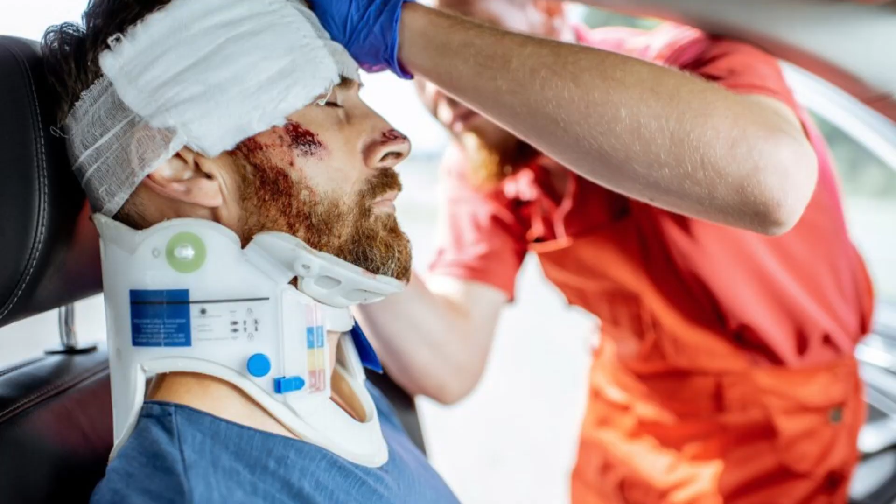Most catastrophic bridge collapse. Bridge collapses are some of the most catastrophic and tragic engineering disasters that can occur. The structural failure of a bridge can lead to significant loss of life, property damage, and disruptions to transportation networks. In this video, we will examine 10 of the most devastating bridge collapses in history, each with its own unique set of circumstances and consequences.

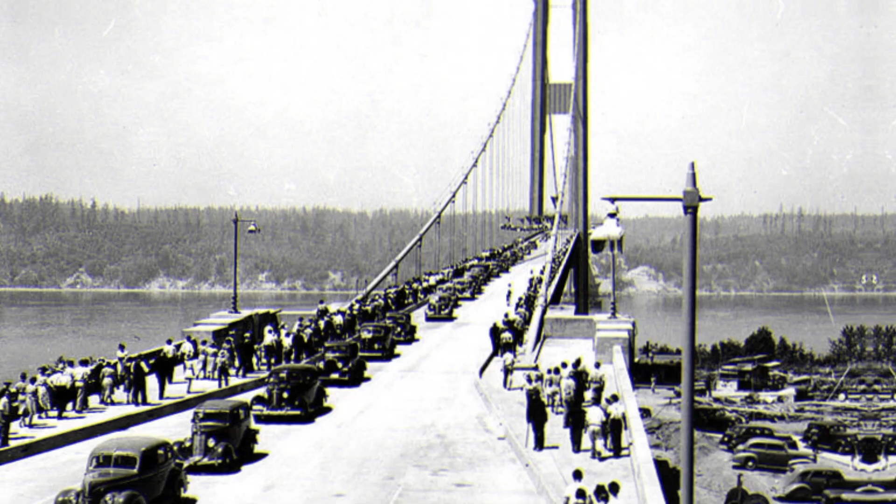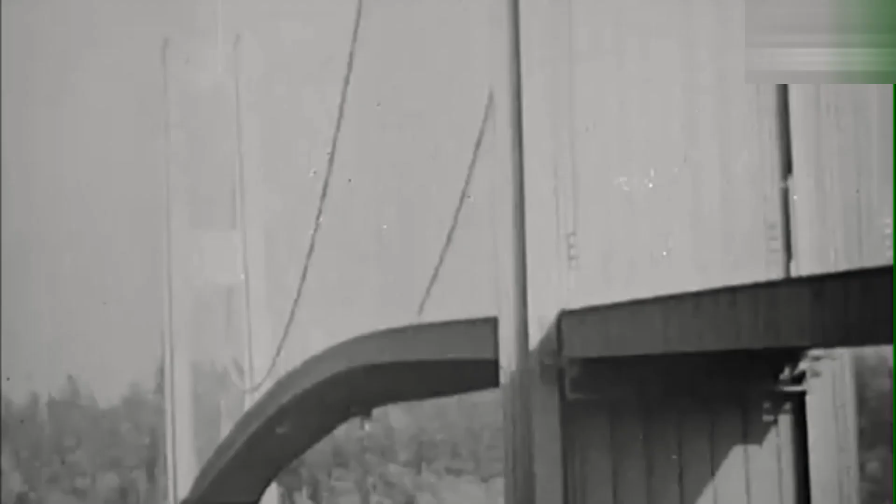1. The Tacoma Narrows Bridge Disaster. On November 7, 1940, the Tacoma Narrows Bridge, infamously known as Galloping Gertie, met its demise in a spectacular fashion. This catastrophe became a pivotal moment in engineering history, primarily attributed to aeroelastic flutter. This phenomenon occurs when winds passing through the bridge's structure induce oscillations that escalate uncontrollably.

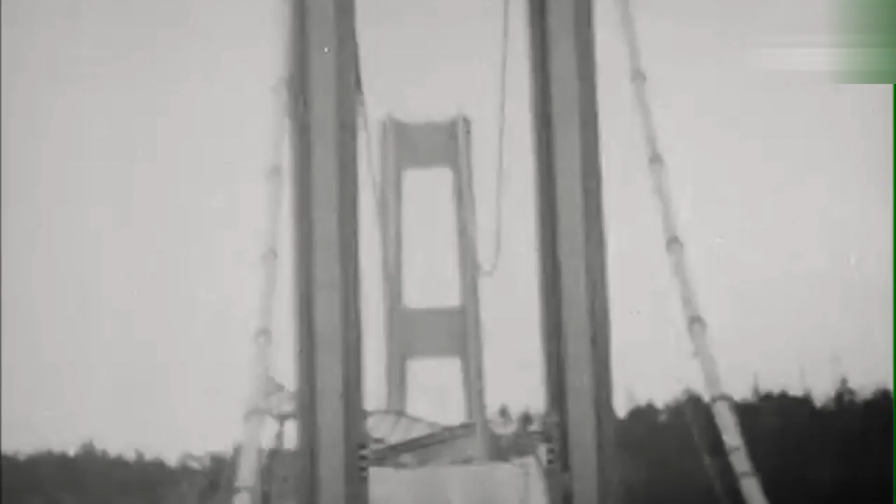Despite the bridge's design to be aerodynamic, it was not equipped to handle the dynamic stress caused by the wind. On that fateful day, with winds reaching speeds of around 40 miles per hour, the bridge began to undulate violently. This movement eventually led to its collapse, sending the roadway plummeting into the waters of the Tacoma Narrows. Remarkably, there was only one casualty, a dog trapped in a car stranded on the bridge.

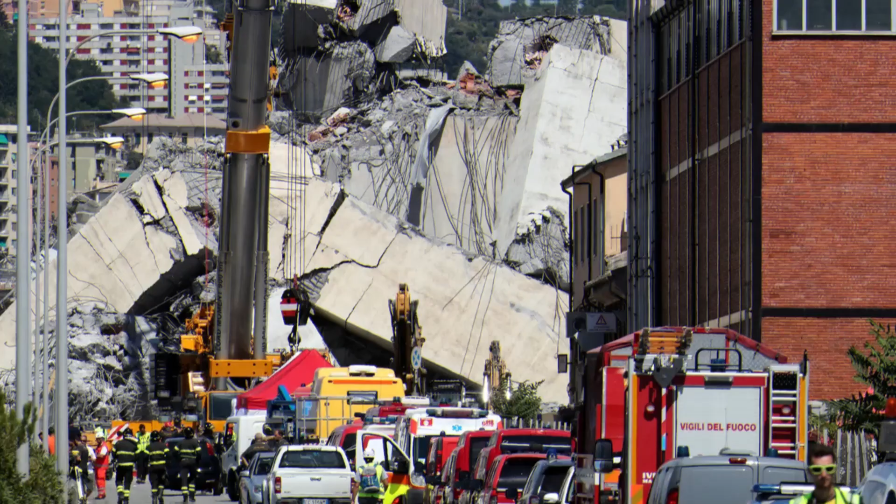2. The Genoa Bridge Collapse. On August 14, 2018, the Morandi Bridge in Genoa, Italy, suffered a catastrophic failure, sending cars and debris crashing to the ground below. This tragic event resulted in 43 fatalities, numerous injuries, and the displacement of hundreds of residents.

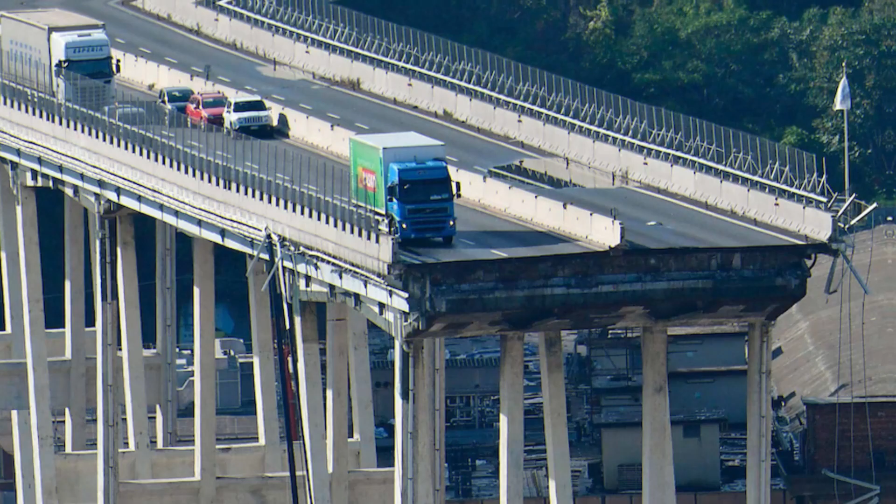Investigation into the collapse pointed to a lethal combination of factors: aging infrastructure, corrosion of concrete and steel reinforcement, and years of neglected maintenance. The design of the bridge, which relied on pre-stressed concrete stays and reinforcements, was scrutinized for its vulnerability to degradation over time.

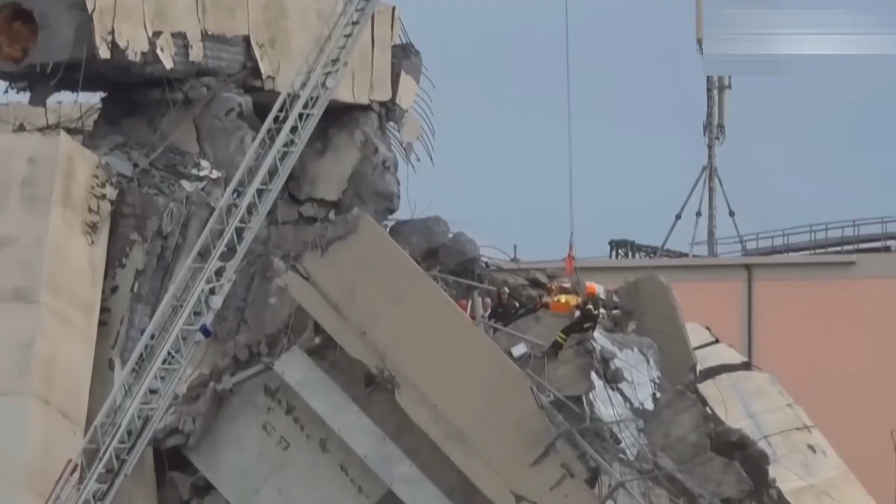In the aftermath, this disaster has become a stark reminder of the critical need for ongoing inspection and maintenance of aging infrastructure to prevent such tragedies. It also sparked a nationwide audit of Italian bridges and viaducts, aiming to ensure their safety and structural integrity.

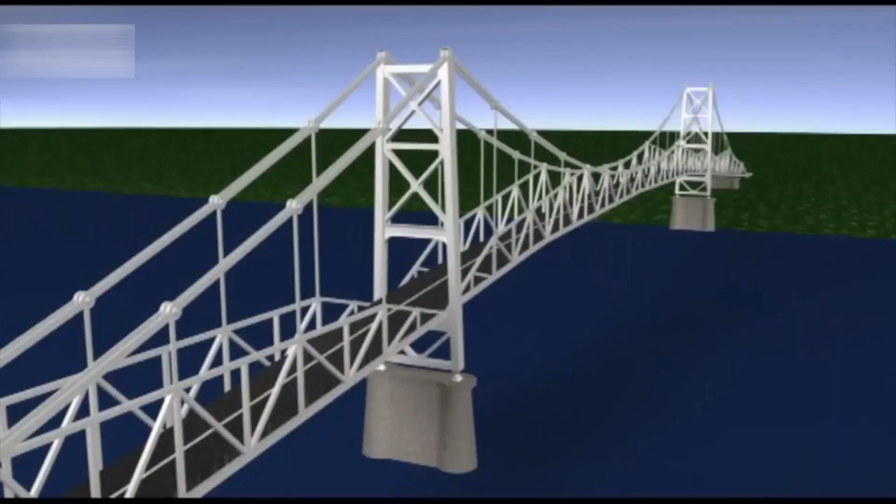3. The Silver Bridge Tragedy. On December 15, 1967, the Silver Bridge, connecting Point Pleasant, West Virginia, and Gallipolis, Ohio, met a grim fate when it suddenly collapsed during rush hour traffic. The bridge, which had been in service since 1928, fell into the Ohio River below, taking with it 46 lives and leaving the communities on both sides in shock.

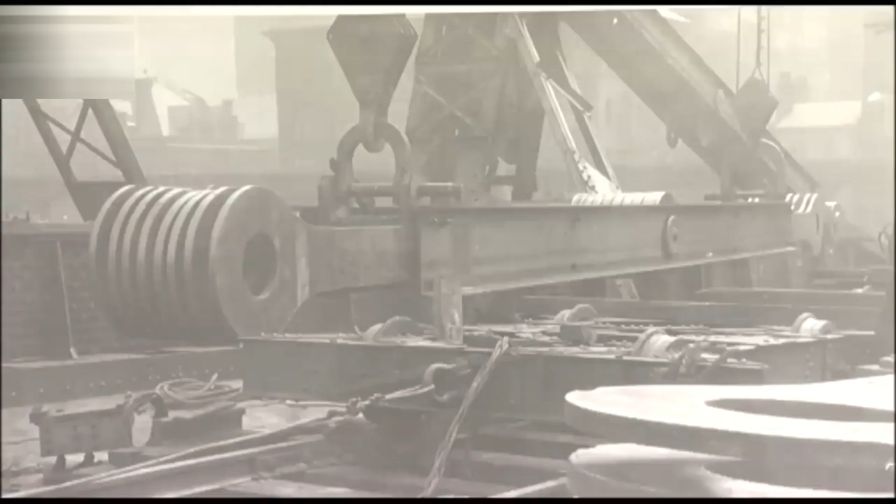The tragedy was traced back to a tiny defect in a single eye-bar in the suspension structure, a critical component that was not adequately inspected or maintained. This flaw led to a chain reaction, resulting in the bridge's complete failure.

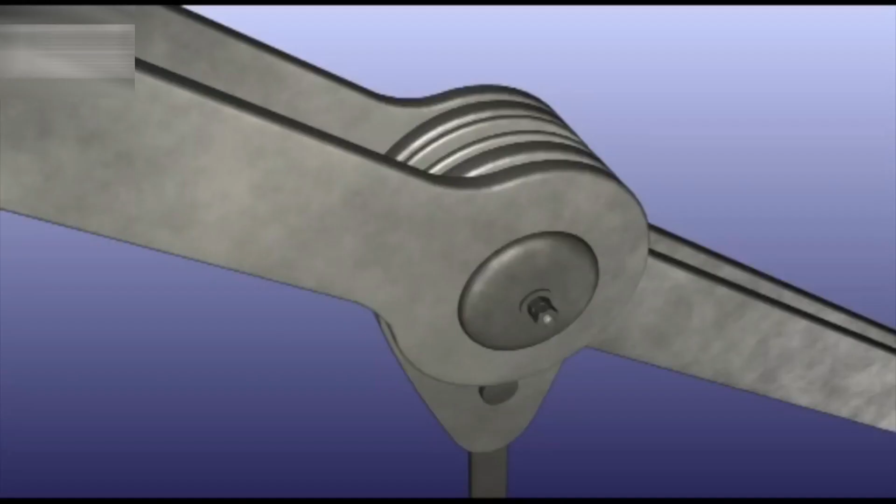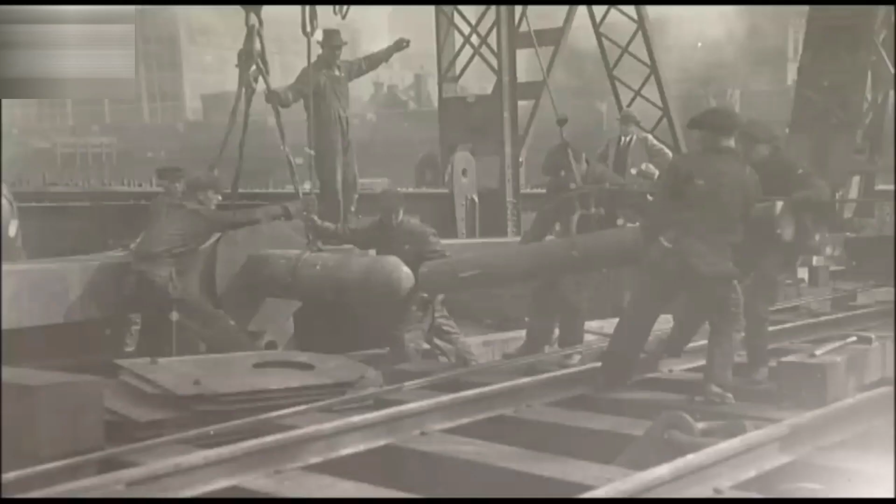The Silver Bridge disaster highlighted the overlooked dangers of material fatigue and corrosion, underscoring the urgent need for regular and thorough inspections of aging infrastructure. It served as a harsh lesson in the potentially fatal consequences of neglecting bridge maintenance and spurred significant changes in how bridges across the United States are inspected and maintained.

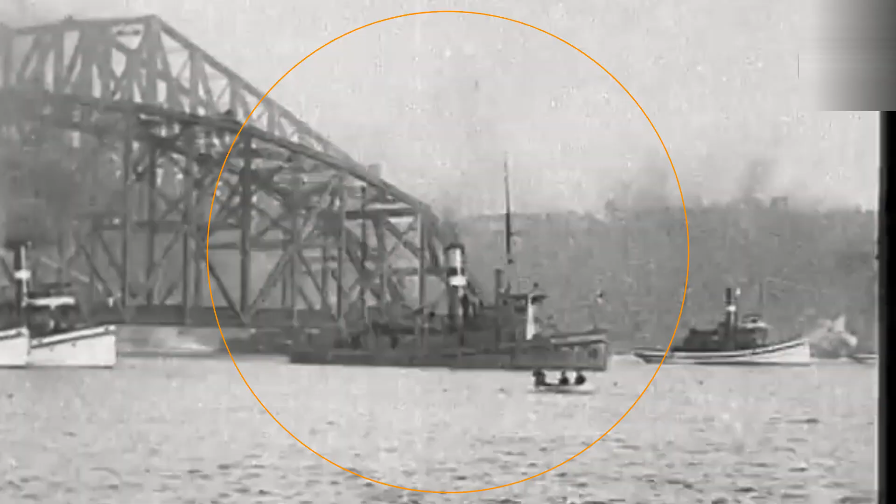4. The Quebec Bridge Collapse. The Quebec Bridge, intended to be a marvel of early 20th century engineering, instead became a case study in the catastrophic consequences of miscalculations and oversight failures.

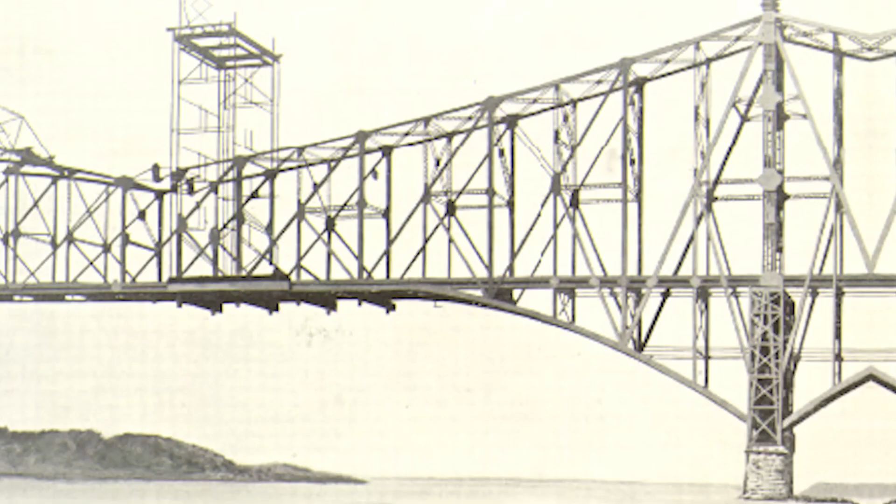The first collapse in 1907 was a devastating blow, resulting in the loss of 75 workers' lives due to inadequate attention to the load-bearing capabilities of the structure. Engineers and constructors had underestimated the weight the bridge would need to support.

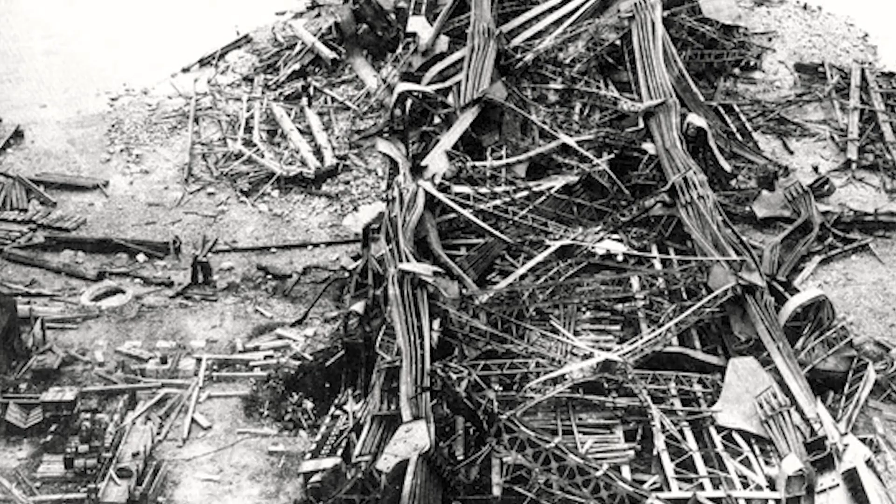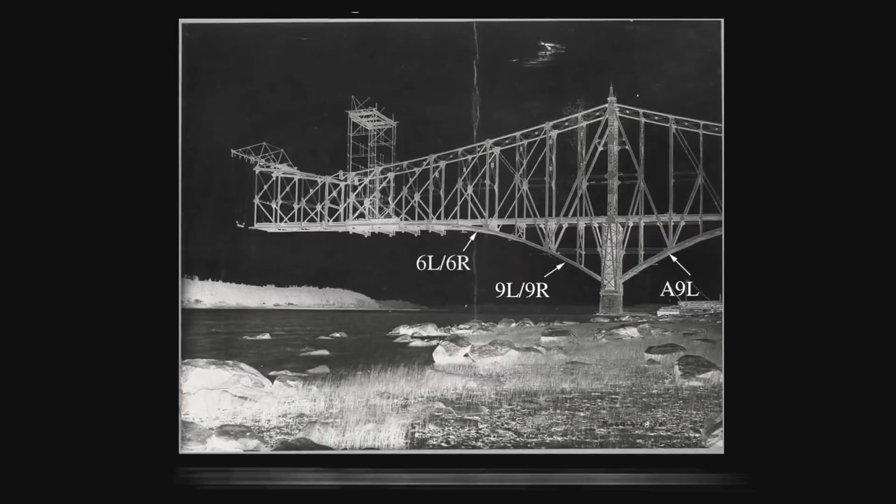This tragedy was compounded by a second collapse in 1916 during the bridge's reconstruction, claiming an additional 13 lives. Miscommunication and the persistence of earlier design flaws contributed to this second failure. These events shook the engineering community, leading to more stringent standards in bridge design and construction oversight.

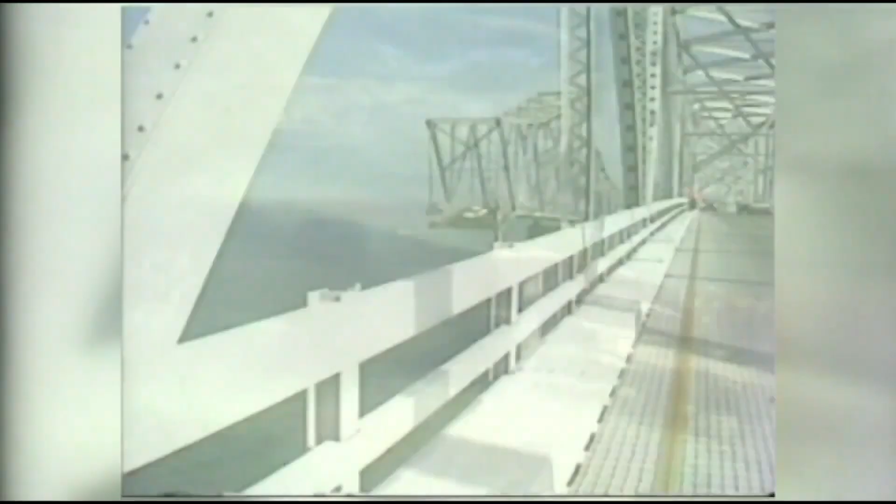5. The Sunshine Skyway Bridge Collapse. On May 9, 1980, a harrowing incident occurred on the Sunshine Skyway Bridge over Tampa Bay, Florida, when the freighter MV Summit Venture collided with a pier during a sudden squall, causing a 1,200-foot section of the bridge to give way. This tragic event resulted in the deaths of 35 individuals as cars and a bus plummeted into the water below.

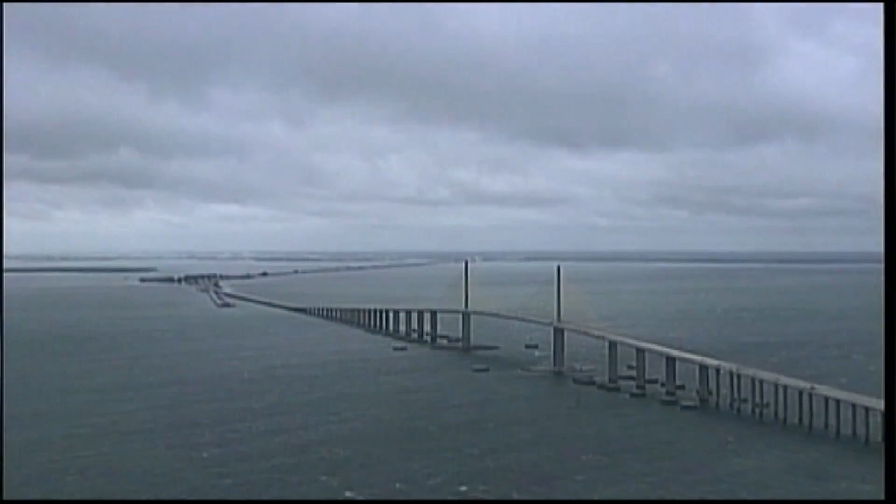The disaster brought to light the vulnerabilities of bridge structures to maritime accidents, prompting a reevaluation of safety measures and navigational protocols in areas prone to extreme weather.

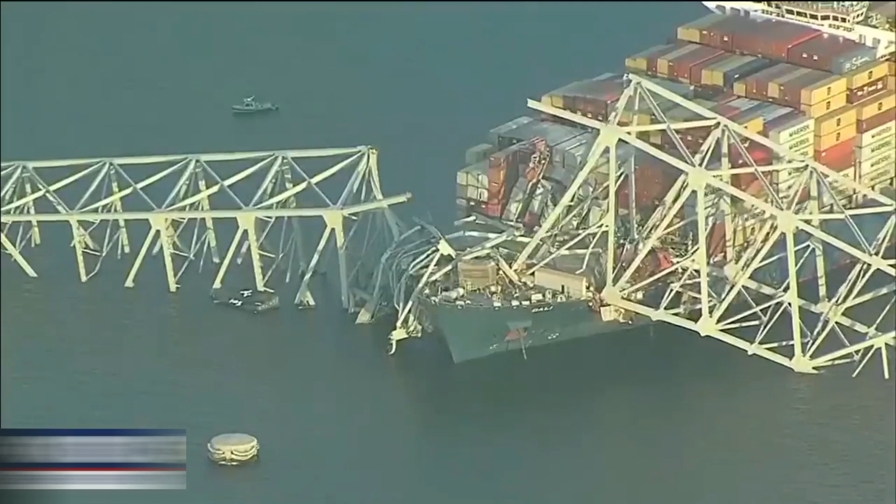This collapse not only highlighted the critical need for robust design and maintenance, but also led to the construction of a new bridge designed with enhanced safety features to prevent such tragedies from occurring in the future.

6. The Minneapolis I-35W Bridge Collapse.

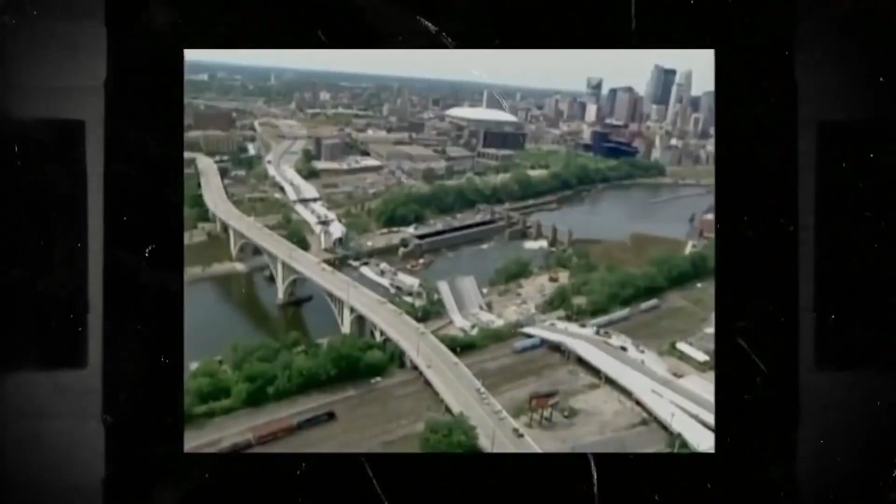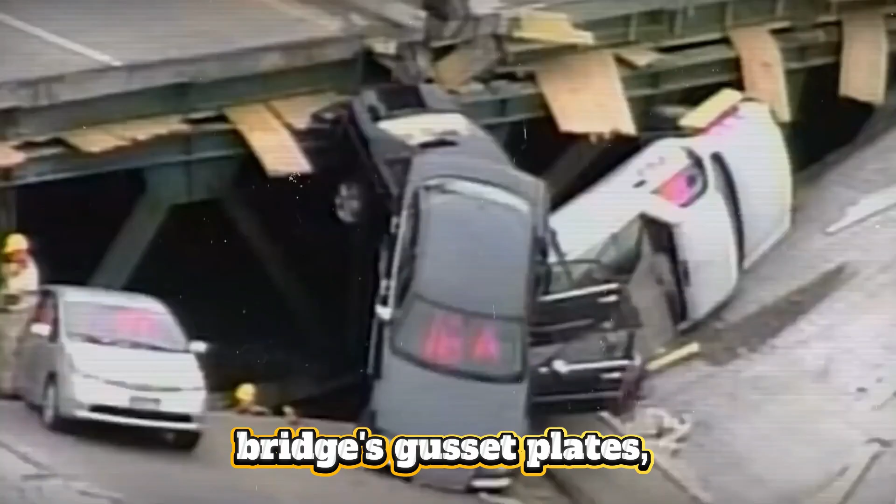On August 1, 2007, an 8-lane bridge along the I-35W in Minneapolis unexpectedly fell during the evening rush hour, bringing with it cars, trucks, and construction equipment into the Mississippi River below. The disaster led to 13 deaths and left over 145 individuals injured. Initial investigations pointed towards a catastrophic failure of the bridge's gusset plates, which were not designed to bear the bridge's weight, especially with the additional load of construction materials and equipment.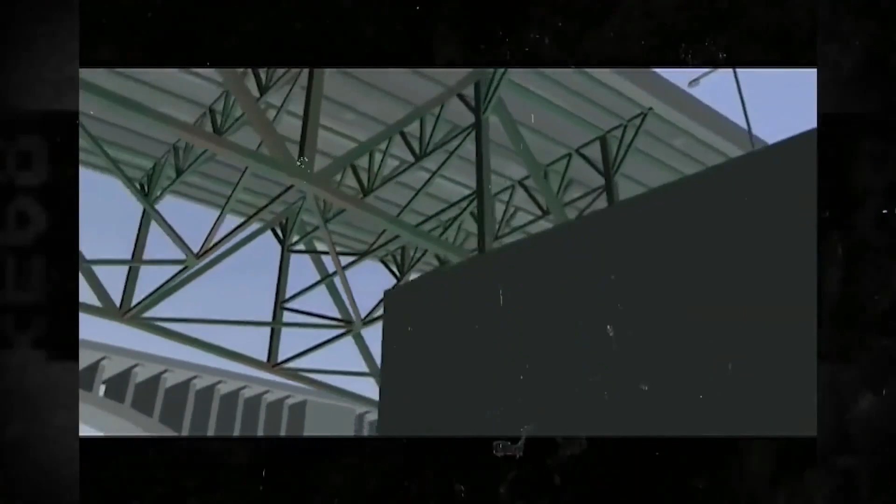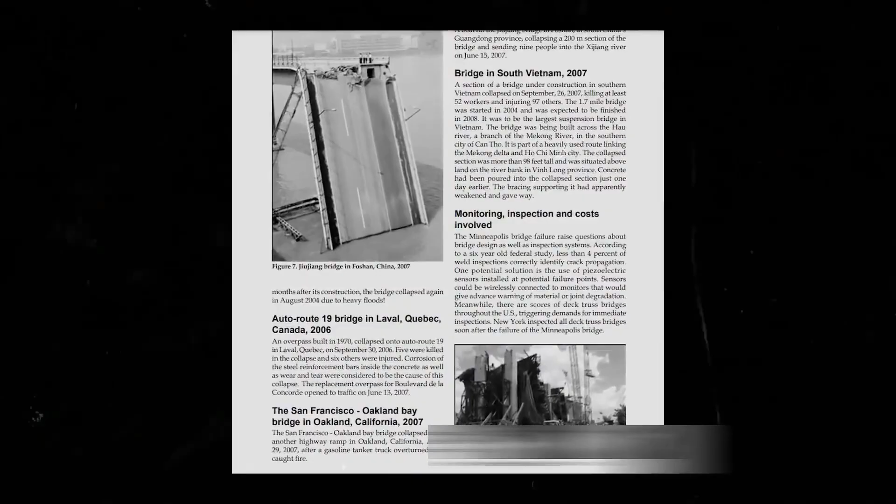This calamity underscored the grave consequences of overlooking critical design elements and the necessity for regular, comprehensive inspections, especially on older infrastructure bearing heavy loads. The event stirred nationwide concern over the condition of the United States' aging infrastructure, instigating debates and calls for significant improvements in public safety standards and inspection protocols for bridges across the country.

7. The Hintze Ribeiro Bridge Disaster.

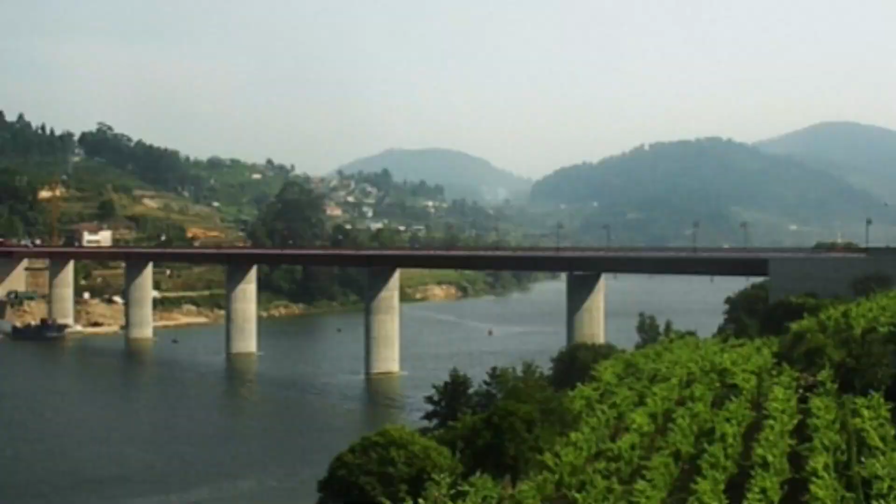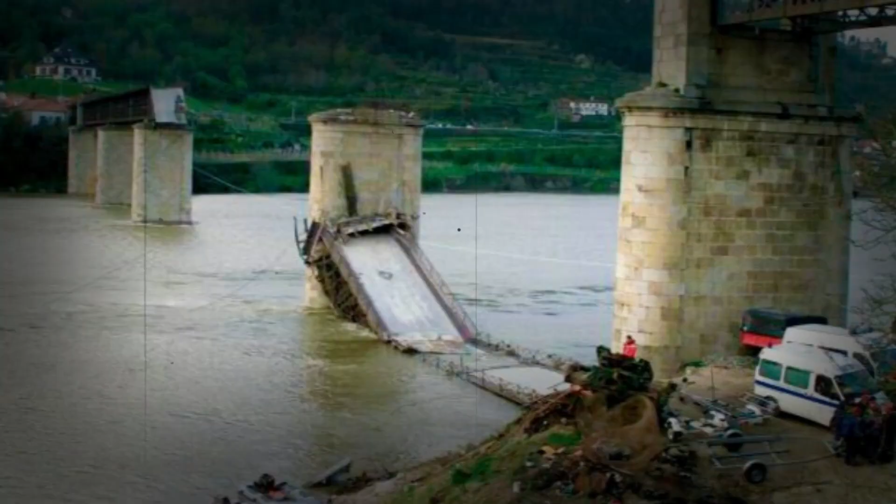On the stormy night of March 4, 2001, the Hintze Ribeiro Bridge, a century-old structure connecting the towns of Entre-os-Rios and Castelo de Paiva in Portugal, tragically collapsed. This horrifying incident resulted in the death of 59 people as a bus and several cars were swept into the raging waters of the Douro River below.

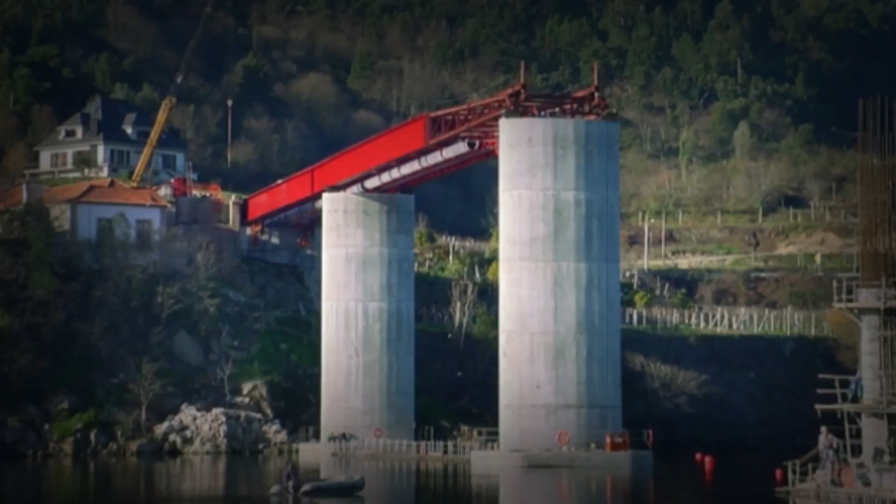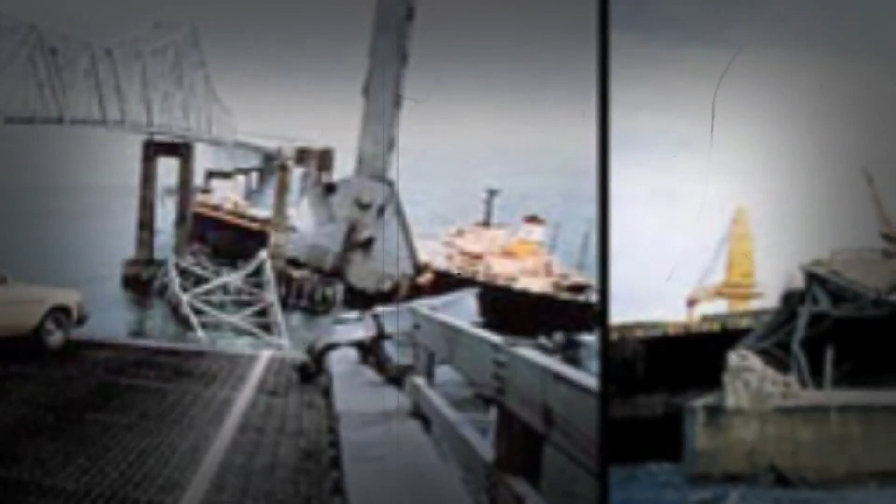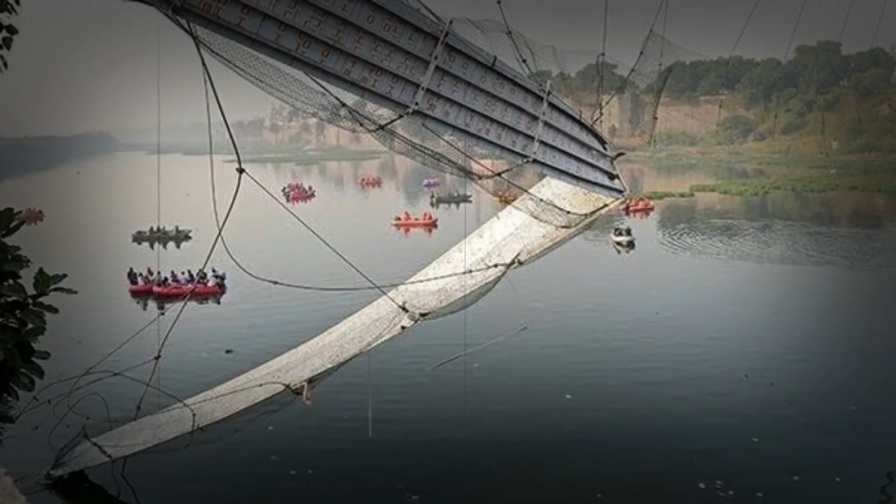Subsequent investigations attributed the collapse to severe structural degradation exacerbated by decades of neglect. The bridge's foundations had been significantly eroded over time, a situation worsened by heavy rainfall and strong currents leading up to the disaster. The catastrophe underscored the perilous consequences of failing to maintain and regularly inspect aging infrastructure. It sparked widespread public outrage and led to a reevaluation of bridge safety protocols in Portugal, aiming to prevent such avoidable tragedies in the future.

8. The Polcevera Viaduct Collapse.

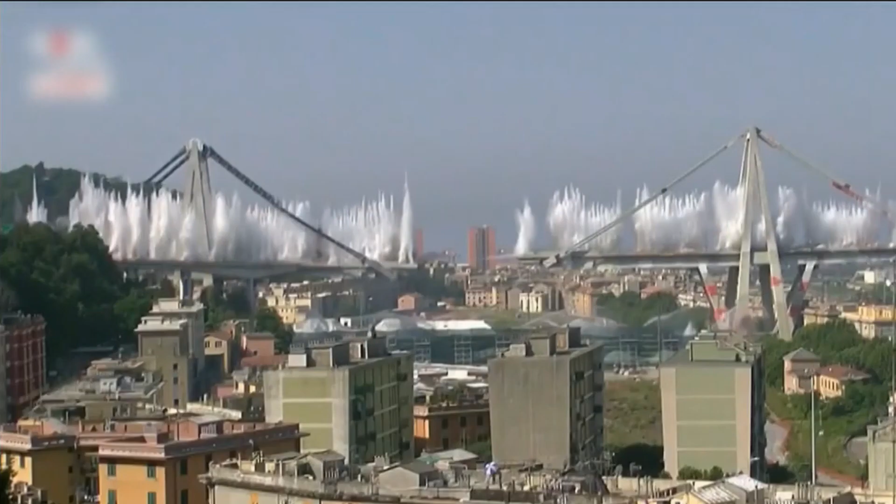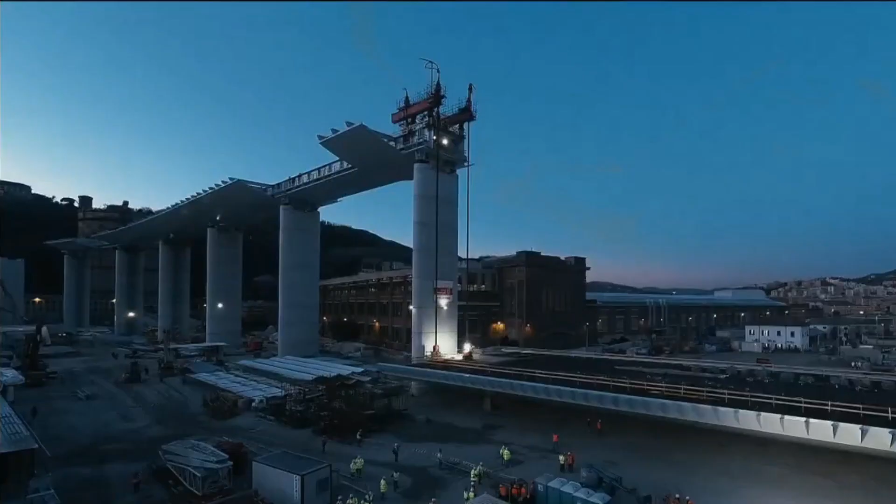The Polcevera Viaduct, more commonly known as the Morandi Bridge, experienced a devastating collapse on August 14, 2018, that shocked the world. The incident took a heavy toll, claiming 43 lives and causing extensive damage to the surrounding area. Investigations into the disaster revealed that the collapse was precipitated by a combination of deteriorating concrete and corrosion of the steel cables within the bridge's structure.

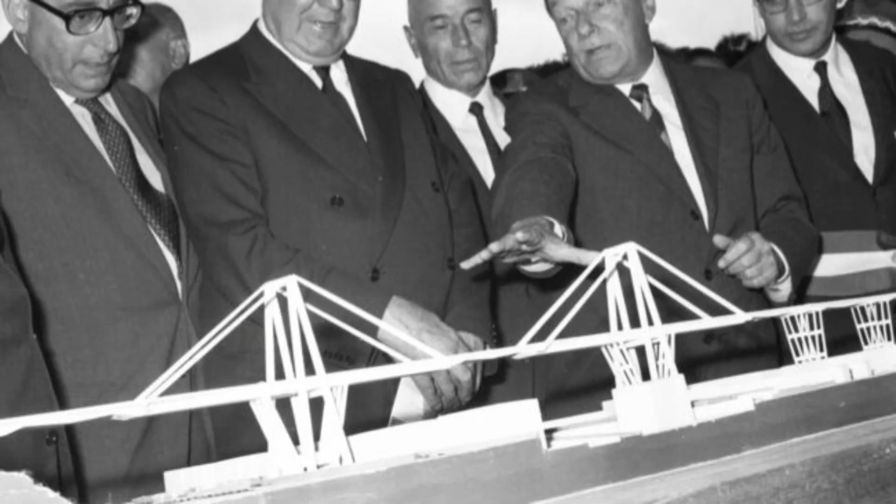These issues were exacerbated by a lack of thorough maintenance over the years. The bridge, designed by Riccardo Morandi and completed in the 1960s, was found to have had vulnerabilities in its design that were not adequately addressed.

9. The Mianus River Bridge Collapse.

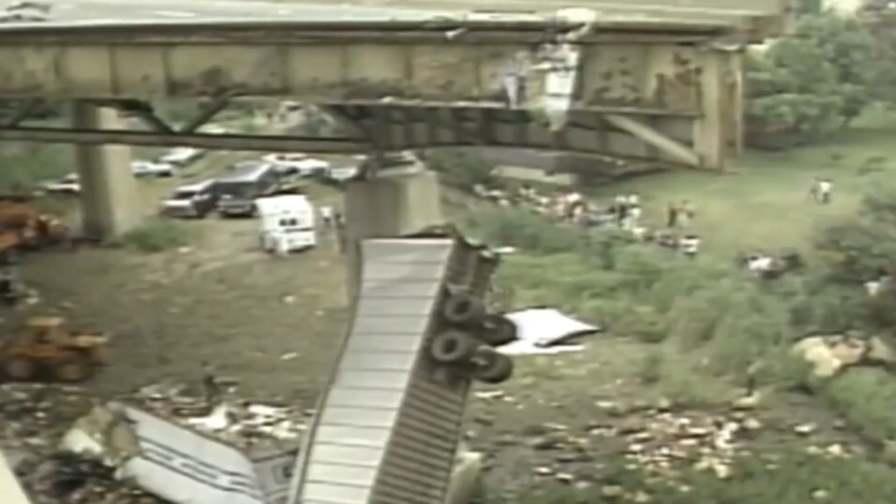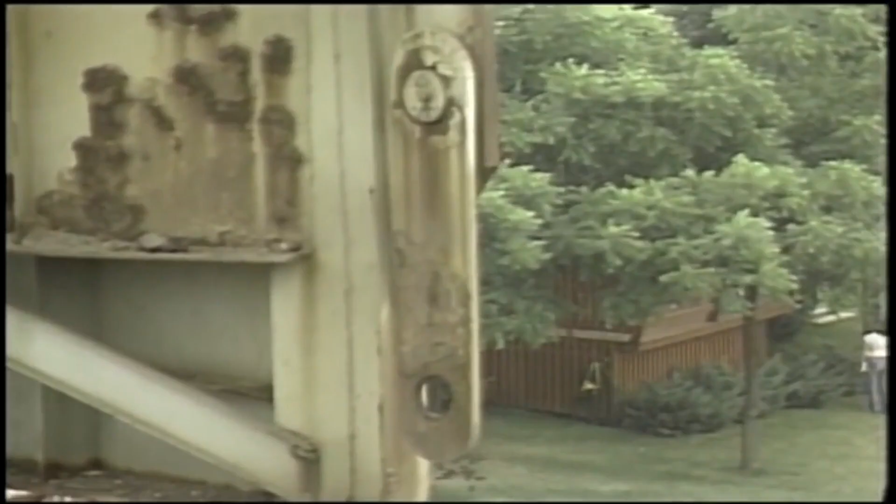In the early hours of June 28, 1983, the Mianus River Bridge on Interstate 95 near Greenwich, Connecticut, experienced a catastrophic failure that took the lives of 3 individuals and injured 3 others. This disaster unfolded when a 100-foot section of the bridge suddenly gave way, plunging vehicles into the gap created by the collapse.

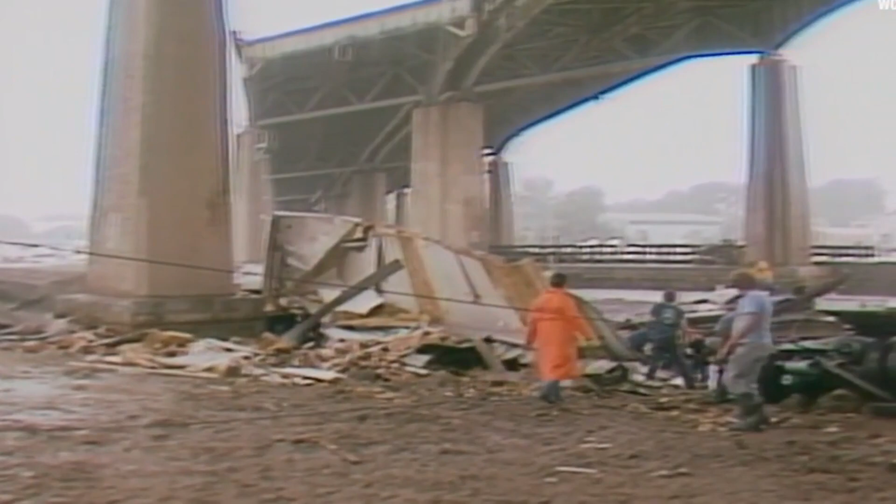Investigation into this tragic event pinpointed the cause to a critical fatigue crack in one of the bridge's support pins. This flaw had gone undetected during routine inspections, underscoring a dire need for more comprehensive and technologically advanced monitoring techniques for bridge components susceptible to stress and wear. The incident served as a grim reminder of the potential consequences of overlooking structural vulnerabilities and reinforced the importance of vigilant, detail-oriented inspections to ensure the safety and integrity of vital transportation infrastructure.

10. The Cypress Street Viaduct Collapse.

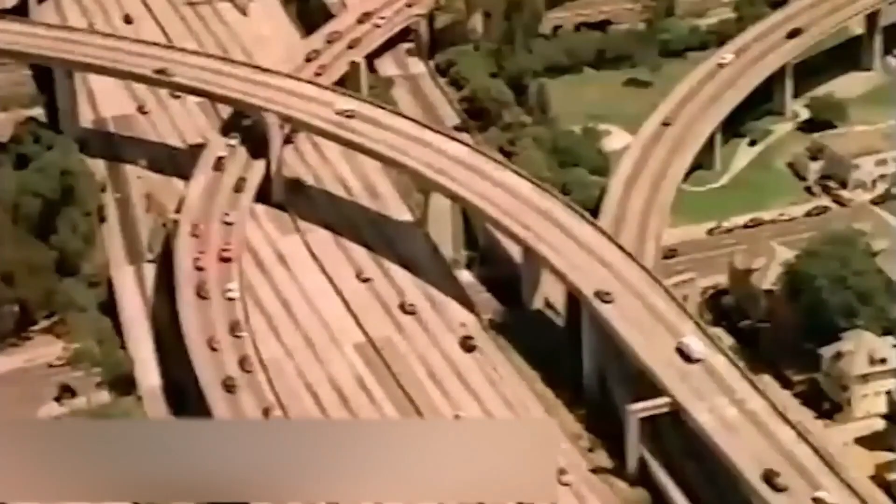On October 17, 1989, the Cypress Street Viaduct faced a catastrophic end when a 6.9 magnitude earthquake struck the San Francisco Bay Area. This segment of the Interstate 880 freeway was rendered a mangled heap of concrete and steel, tragically claiming the lives of 42 people.

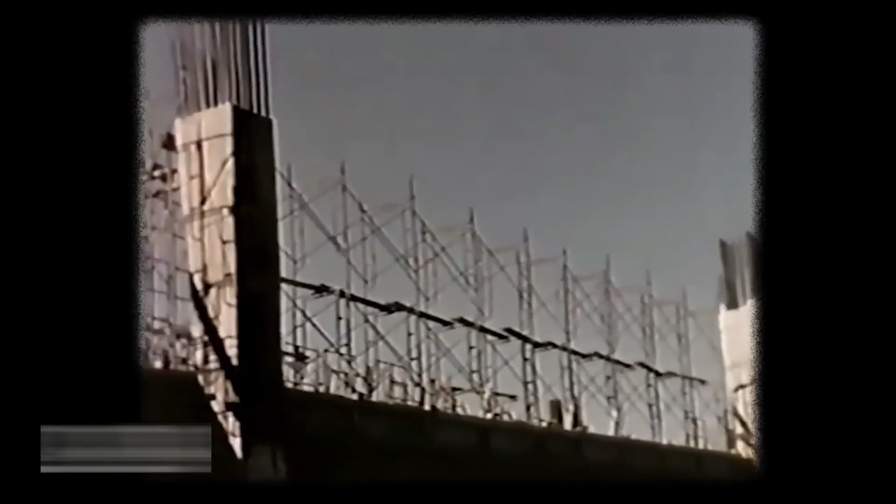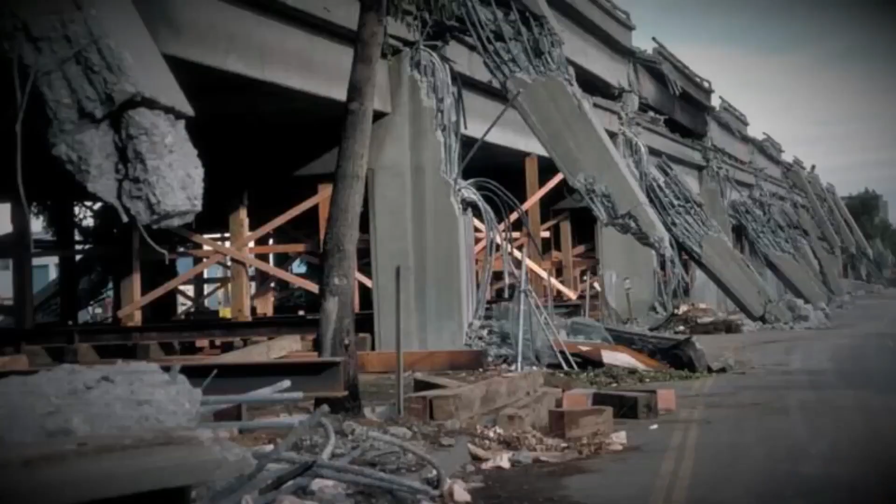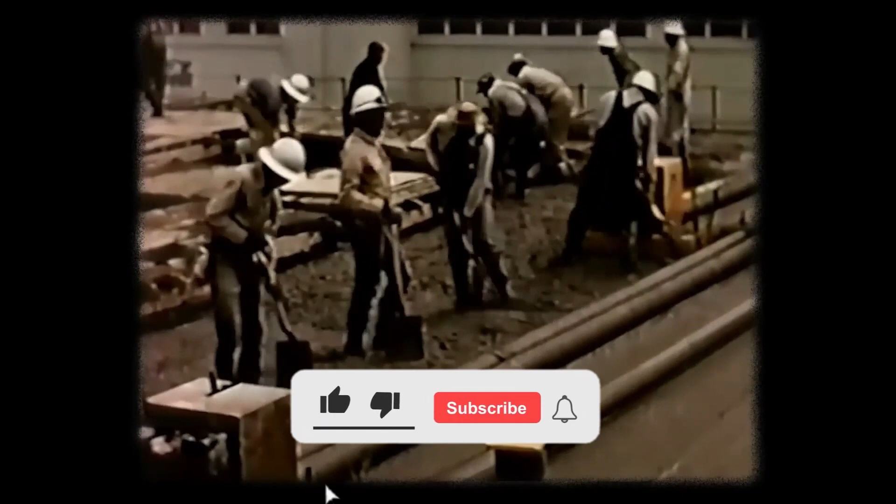The disaster revealed significant oversights in the original engineering and construction of the viaduct, most notably its inability to withstand seismic forces. Built on soft soil and utilizing an outdated double-decker design, the structure's collapse prompted a critical reassessment of earthquake preparedness and infrastructure resilience across California and beyond. It led to widespread improvements in seismic engineering standards, ensuring future structures could better absorb and survive the forces unleashed by such natural disasters.